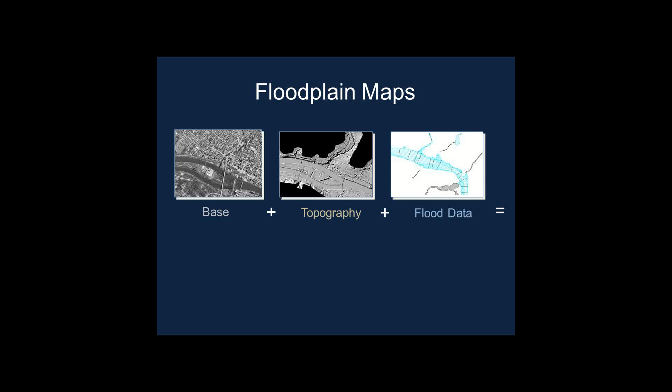And then imposed on that are a couple different engineering modeling techniques that predict and model the amount of water that flows through a stream or a floodplain and predicts the behavior of that water as it flows through the area. And then using those engineering and other techniques, they come up with these digital flood insurance rate maps.

And these are called, you'll hear us talk about flood insurance rate maps or FIRMs, and we'll get back to that a little bit later. And these are the official regulatory products that communities have to use in their floodplain management. And this essentially shows what happens in a 100-year or a 1% annual chance flood event. This shows where the flood is going to be.

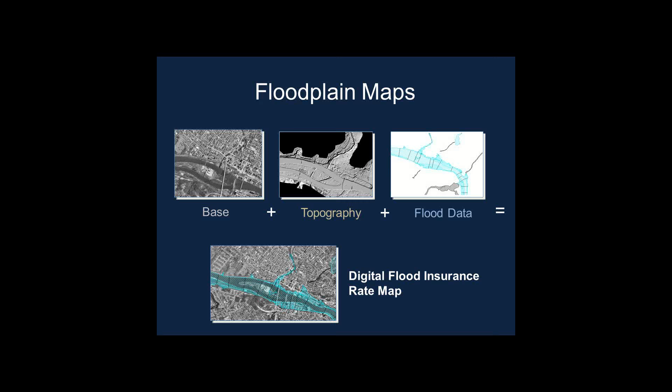And again, a lot of people say, well, it's never flooded here, so I don't have to worry about it. But they really do. This is reality. This isn't made up. These are accurate models that show where a flood is going to happen. And then based on those, communities have the responsibility to manage development in these floodplains that are on the map, and to regulate development here.

And for the folks in local government out there, if it's not your department, someone else in your local government is the one that is actually managing this development. And I think it's really important that planners, whether they're working on long-range plans or more of the development review side, understand what goes on in floodplain management, because it really does affect everything the community does, all aspects of how a community grows or develops.

So to take a little bit of a step back, communities have to elect to participate in the National Flood Insurance Program. And communities do that by agreeing to manage development in the floodplains and adopting an ordinance. And when they do that, then federal flood insurance is available to structure owners in the community. And so they participate largely because flood insurance is required by a building owner to obtain a federally backed mortgage. If they don't have flood insurance, the bank cannot lend to them.

And so an individual can only receive flood insurance if their community as a whole participates and stays in good standing with the National Flood Insurance Program. So this is one big incentive for communities to participate. And this is actually unique in the world. The U.S. is the only place that does it this way.

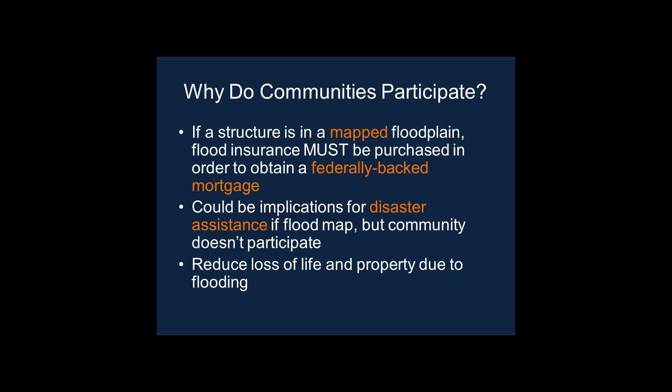Another reason why communities participate is that there could be implications for the availability of disaster assistance if there is a flood map that covers the community. And if the community doesn't participate, they may have limited access to the disaster funds. And at the end of the day, everything to do with floodplain management just reduces the loss of life and property due to flooding. That's what this is all about. The safer we have our buildings and the safer we have our people, the more resilient our communities are going to be.

And so everything in floodplain management comes from Title 44 in the Code of Federal Regulations. If you want to sleep at night, I recommend picking this up. And this is where everything can be found to do with floodplain management. And then in many states, they have their own separate state statutes or state regulations that deal with floodplain management. Here's an example of the Nebraska statutes.

And uniquely, Nebraska had our floodplain management statutes in place before the federal ones. So even if the federal regulations go away, communities in Nebraska still have to manage their development in floodplains. And then a lot of states will provide a sample ordinance or some sort of minimum standards that would go into an ordinance for communities. And this is an example, again, of Nebraska's minimum standards.

And so once you have these things in place, there is sort of a tiered level of regulations that have to be put in place based on the level of flood risk that is identified in a community. And these reference the elements of the CFR that relate to the regulations that have to be in place.

But for example, I think what's really important here is if you're in a community or working in a community that doesn't have a flood insurance rate map, they can still join the National Flood Insurance Program. It's still good to do so. And they have to make sure that development in their community is reasonably safe from flooding. I mean, if it's not mapped, if there's not a floodplain map, but there's a stream in the community, pretty evident that there may be flooding around that stream.

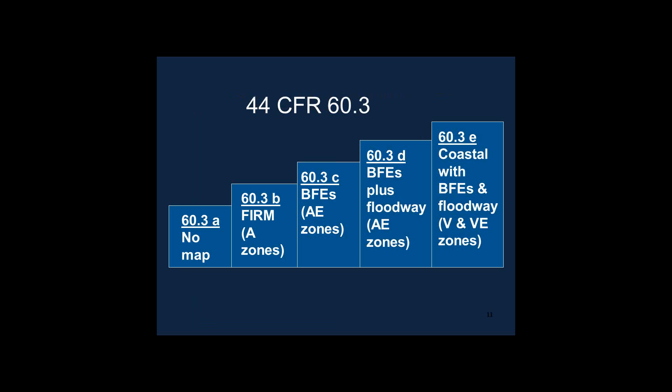And then taking a step up, when a community has a flood insurance rate map, there are various flood elevations that are determined or not determined in the creation of that map. And if there are no flood elevations determined, that's 60.3b, then a community can still participate, and they have to regulate development in a little different way. And then the more detailed the flood maps are as you go up this ladder, the more a community has in their power to regulate that development.

So really everything in floodplain management is pretty black and white, but there is a lot of gray areas. And that's why we have state entities like myself or like the Department of Natural Resources here. We help communities really understand those gray areas. And in many other states, there are similar departments and similar agencies that do that. And so it's wise to check that out.

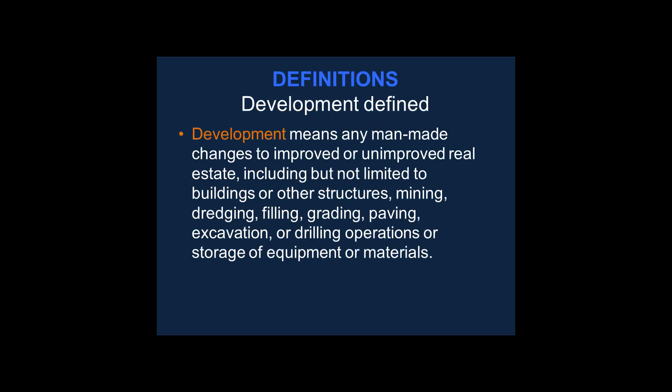And so I think what's really important is to help planners understand some of the big concepts in floodplain management, and that will help them really see where they can fit their activities into what the rest of the local communities do. And so I think that the first piece is really the definition of development. Floodplain management means regulating development in floodplains and anywhere in your community, and development is really just about everything you can think of. It's buildings, it's mining, it's filling, it's grading, it's storage of materials. Whatever it is needs to have some sort of floodplain development permit.

And that's the crux of everything we do in floodplain management, permitting any kind of development in the floodplains. And that's what local communities have the responsibility to do as they participate in the National Flood Insurance Program. And so these are some of the typical scenarios where we see floodplain development permits required, whether it's a new residential structure, any additions or improvements to existing structures, repair due to damage from natural hazards or fire, any kind of fill added, or public facilities improvements too.

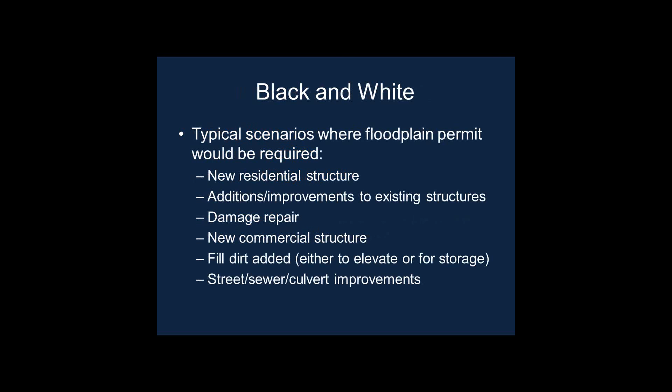And in a lot of communities, these are tied to building permits or zoning permits. But even in communities that don't have these, a lot of our small towns in Nebraska don't have building permits or zoning codes. And if they participate in the National Flood Insurance Program, they still need to regulate and permit development. And so they do that through a variety of means. And if anyone has questions about that, we can maybe answer those in the Q&A session. So again, a lot about floodplain management is technical.

And there are some other definitions that we should think of as we move forward in the presentation. A flood, by FEMA's definition for the flood insurance program, is surface water that affects a building on normally dry land areas. It does not mean groundwater, and in some cases does not mean rain that comes in through a hole in your roof. And a floodplain is any land susceptible to being inundated, and these are what are shown on the map. They may not be really anywhere near what someone would think of as a creek or a shoreline. A floodplain may extend very far into a community, and some people may say, well, I don't understand why there's a floodplain here, but it's shown on the map.

And the SFHA is a special flood hazard area. This is our technical term for floodplain, and you'll see that a lot if you delve into floodplain management. And the SFHA is designated by various flood zones. I've listed the A's here, but in coastal areas they are called the V zones. And then outside of the 1% annual chance, there are X zones.

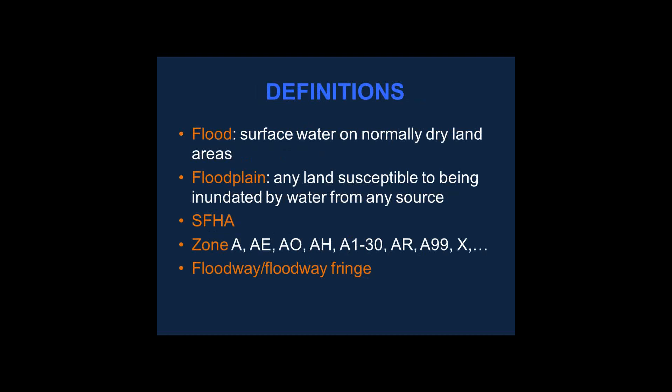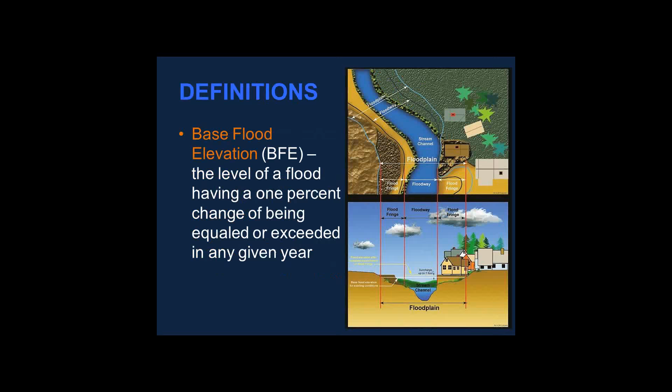And this is the level of a flood, the height of the flood in a 100-year event. And this is what development is based on and the regulations are based on. We'll come back to that here in a couple slides.

At the end of the day, these are some of the certificates and permits that communities deal with. Everything has to have a floodplain development permit. In some cases and in some scenarios, they'll need engineering certificates, and in some cases, they'll need elevation certificates. And if it's development in a floodway, in certain places, no-rise certificates are required.

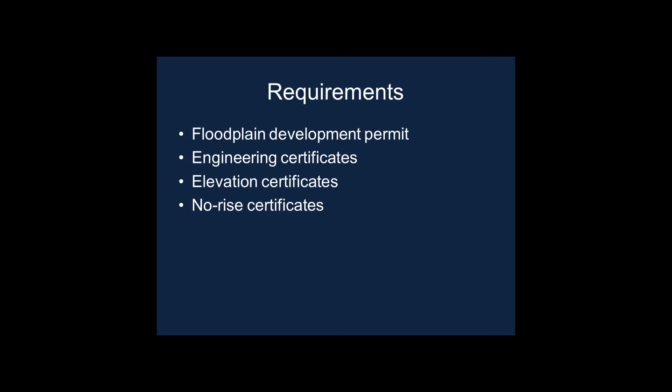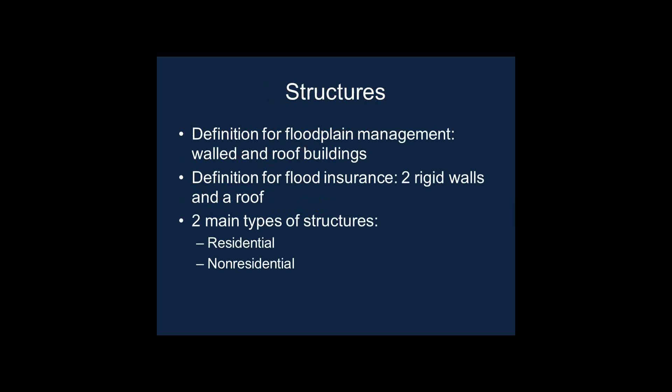And again, for floodplain management, structures are defined as walled and roofed buildings. And for flood insurance, which is a little different, a structure is considered 2 rigid walls and a roof. And in general, there really are 2 main types of structures, residential and non-residential, as well as appurtenant, although that gets a little into the weeds. But there is not necessarily a definition of commercial or public facilities. Everything is residential or non-residential for floodplain management.

And in Nebraska, we have higher standards than the minimum, but we require any residential structure to have their lowest floor, including the basement, elevated to at least 1 foot above that 100-year flood level, the base flood elevation. And this is really the key thing that I think communities need to make their other staffs aware of, is that this lowest floor is the deciding factor on the development of any particular residential structure.

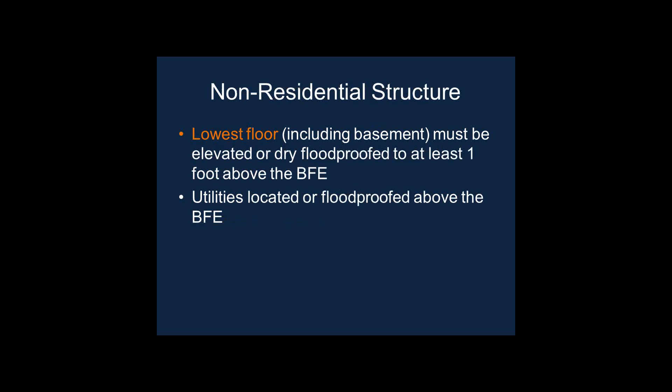And then for non-residential structures, again, this is in Nebraska, you should check in your own states. They have to be elevated or dry flood-proofed to at least 1 foot above the base flood elevation. And dry flood-proofing is a technique to keep the water out of a building. Again, that's going into the weeds.

And often we have building sites that are too low or a structure that needs to come into compliance with that 1 foot above base flood elevation. And there are various ways that we go about helping individual property owners do that. On a residential structure, in some communities, you can add fill to a site to elevate it above the base flood elevation. In some communities, you can't. That's something that you really need to check on in your own communities.

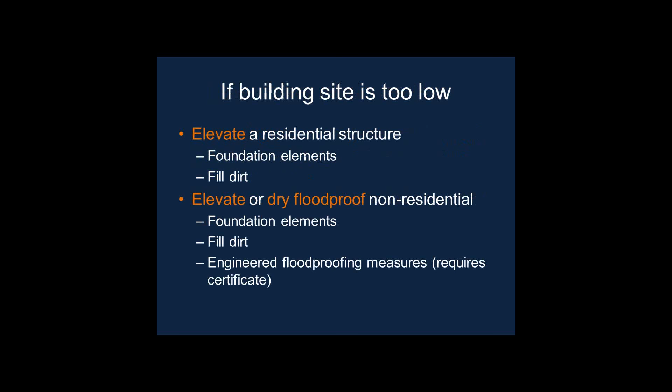And then obviously adding foundation elements, like adding more blocks to the foundation or adding piers or something can certainly elevate a structure to above the base flood elevation. And on non-residential structures, you can also engineer flood-proofing measures, but this requires an engineering certificate.

Stepping back a little bit, I think this is outside of the purview of the National Flood Insurance Program, but as a planner, I think it's really good for planners to understand how floodplain management could factor into long-range planning. And I think at the end of the day, floodplain management really does give planners good tools to use when they think long-term. We give flood maps. The flood maps are there. They're available to anyone, and they show where the true flood risk is.

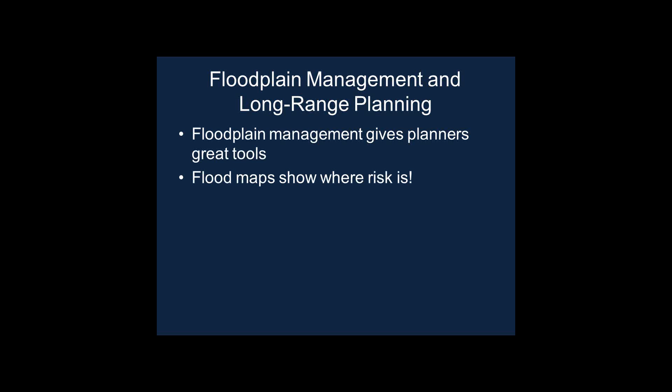And I think it's our responsibility as planners to pull this out, to put this in our long-range plans, and to really show people that the best practice is just to not develop in a floodplain. Some communities don't have a choice, whether it's located on the coast, or some communities are located entirely in a floodplain, and they might not have known that in the mid-1800s when they developed there. But for new growth areas, it comes down to the simple fact of just don't develop in the floodplain.

They're risky areas, development's more expensive, and it really does disrupt people's lives when a flood does occur. And it's not if, it is when a flood occurs. And I think when planners focus on flood risk in long-range planning, they really can use that opportunity to help a community grow in a different direction, which really is cheaper in the long run. It creates more resilient communities, neighborhoods, and homes.

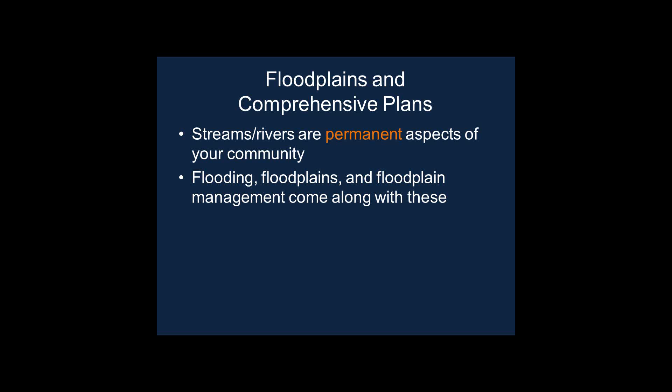And I think comprehensive plans are obviously good places to do that. Comprehensive plan looks at your community as it exists now. Streams and rivers are permanent aspects. You can't remove them. You can maybe change them, but they are permanent aspects, and the floodplains that come along with them are also permanent. And comprehensive plans are good places to discuss this and to have a community conversation about it. They really should account for floodplains and for the flood risk that is apparent in communities.

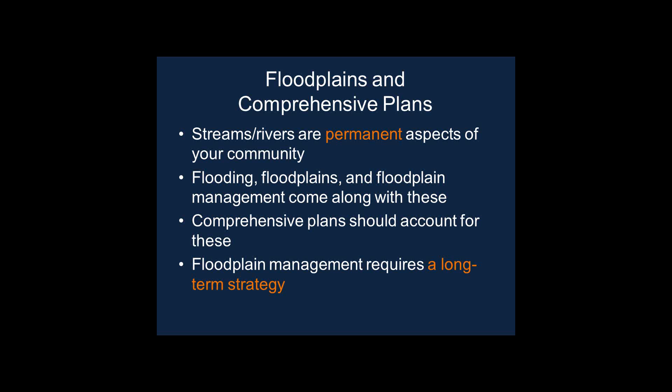And good floodplain management really does require a long-term strategy. Typically, we deal with individual homes, individual businesses when we do the permitting day-to-day. But I think if a community wants to be truly resilient, it does require a long-term strategy. I think at the end of the day, any community that has a floodplain can see it as a limitation, or they can see it as an opportunity.

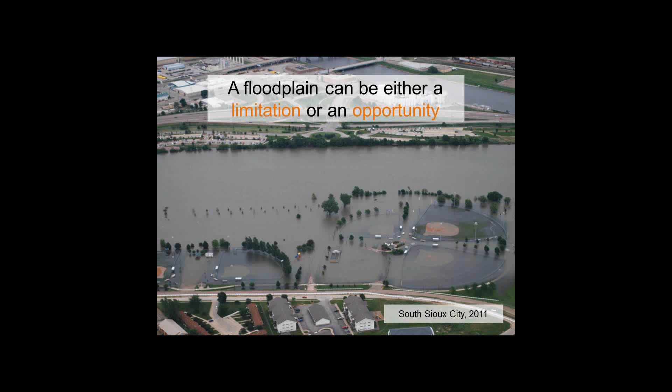And so now I'm going to turn it over to Shandy to talk to us about flood insurance. I think we're good to go. Shandy, take it away.

All right. Hi, everyone. I'm just going to expand my screen here. There we go. Oops. Would help to start at the beginning here. Can I just get a quick confirmation that my screen is showing? It is. Great. Thank you, Elizabeth.

So as Mitch said, I'm going to focus this last part of our presentation on flood insurance. My name is Shandy Telshik. I am currently a Natural Hazards Program Specialist with FEMA Region 7, which is located in the Kansas City office.

And I specifically focus on the National Flood Insurance Program and work with communities that participate in the program and communities that would like to participate in the program, providing technical assistance on the various aspects of the NFIP. And specifically, I work with the state of Nebraska and work with Mitch quite a bit.

So I'll just reiterate something that Mitch said, which is basically summarizing the National Flood Insurance Program, or NFIP for short. It is a federal program. It was established through the passing of the National Flood Insurance Act of 1968. And basically, it's a voluntary program that's based on an agreement between local communities and the federal government.

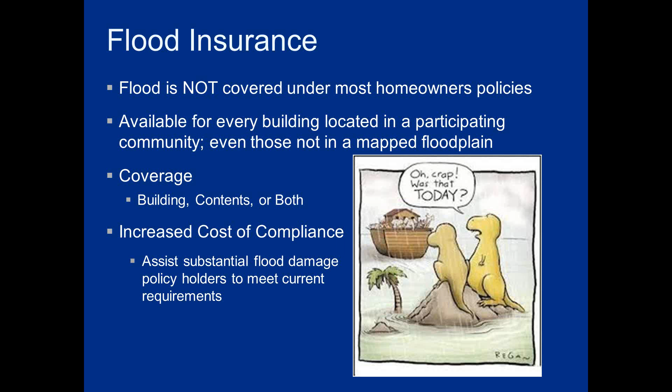I'll move on. So insurable by the NFIP. We get a lot of questions when we're out talking with communities, especially after those floods, about what does flood insurance actually cover. A lot of questions about croplands here in the Midwest, and the National Flood Insurance really only covers damage to structures. We're looking at walled and roof structures, principally above ground, manufactured homes or travel trailers. If they're anchored on a permanent foundation, we're going to cover those contents of those structures. And we'll also cover buildings that are in the course of construction as well.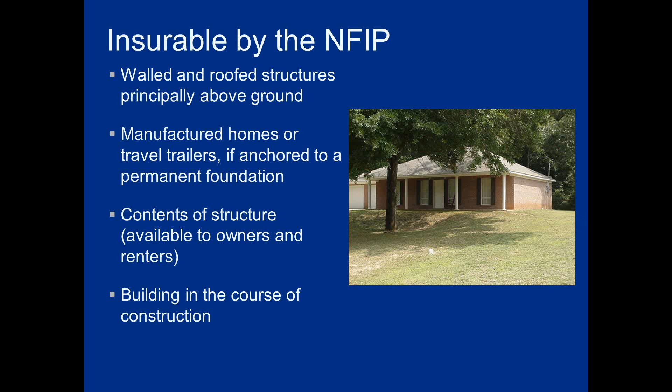Now, another thing we definitely want to cover when we talk about flood insurance is what goes into establishing a premium for a structure and how much premium a person will pay for this flood coverage for their home. I would say the two most important things that come into play are the flood zone and then the lowest floor elevation compared to the base flood elevation for that structure.

The flood zone, that's going to be, as Mitch described, basically, is that structure in the high-risk floodplain or the low-risk floodplain? The high-risk floodplains are those zones that begin with A or V, like in velocity zones along the coast. Or is it in a low-risk floodplain? And those zones start with C, B, or X. So the higher risk flood zones, as you can imagine, are going to cost more than those low risk zones.

Also, I'm going to skip one here on my bullet point because I think the lowest floor elevation compared to the base elevation is going to be the next most important factor used for rating. So when a structure is built, that lowest floor, including a basement or crawl space floor, will be compared to the base flood elevation. And there's an indirect relationship here between that lowest floor compared to the base flood elevation and how much premium will be charged. So basically, the higher the lowest floor is compared to the base flood elevation, the cheaper the flood insurance rate will be. I'll go into this in a little bit more detail in the next couple of slides.

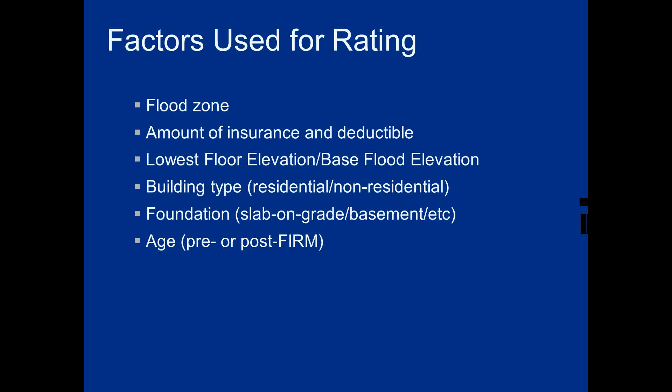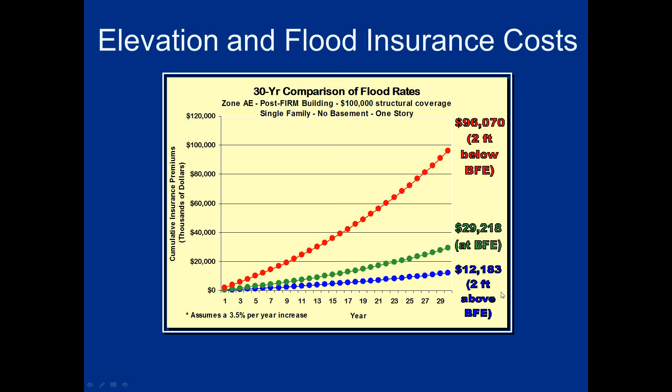I have another way to illustrate this. This illustration was put together as a result of some legislation that was passed in 2012, and I'll be touching on that here shortly. But again, illustrating the difference that following floodplain management and elevating structures can really make for the individual for their insurance premiums.

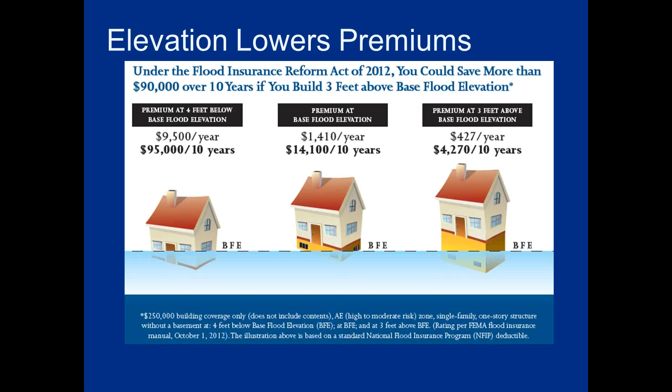So really the bottom line here is that all these different aspects of the National Flood Insurance Program really do work together. Everything on the floodplain management side directly or indirectly affects flood insurance rates. When high-risk areas are identified, revising those maps, when communities want to do any kind of flood risk reduction projects, we always encourage them to budget for that potential map change, because if there's decreased risk in the community, we definitely want the maps to show that decreased risk as well.

And then the as-constructed elevation certificates, these are documents that communities can use to document that the structures they are permitting in their community are in compliance with the floodplain management regulations. These are also a hugely important tool for flood insurance agents, because the agent really has no other way to know anything about the structure that they're insuring, especially from the flood side of what they're looking at. So these elevation certificates, if you've never seen one, it's a FEMA form.

It contains information about the location of the structure, address, property owner name, community information, base flood elevation of the structure's location. It has various elevation information such as lowest floor, next higher floor, the elevation of the mechanical and utilities, and electrical connections. There's also lowest adjacent grade and highest adjacent grade elevations on the exterior of the structure. These are all important elevation notes that go into the insurance agent's software so that the structure can be accurately rated.

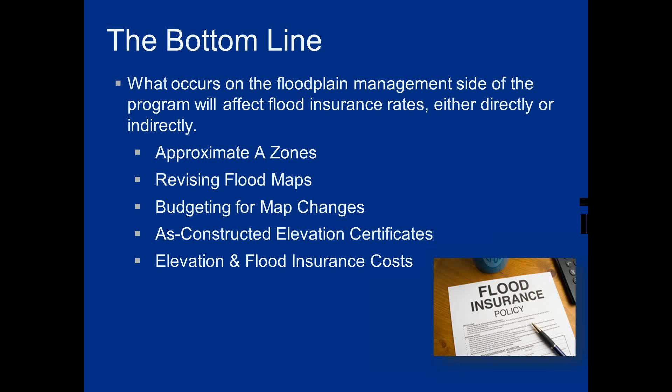Now I did want to touch some on the legislative reform that's happened in the last few years. In July of 2012, Congress passed what was called the Biggert-Waters Flood Insurance Reform Act of 2012, and the whole point of this, I know it's no secret to probably anyone on this call, is that the National Flood Insurance Program is quite a bit in debt, and in recognition of that, Congress basically, with the passing of this Biggert-Waters Flood Insurance Reform Act, wanted to move the National Flood Insurance Program to a more actuarial-based premium rating structure.

To give you a little bit of background on that, I described those pre-FIRM and post-FIRM structures. Well, pre-FIRM structures were moved into a subsidized flood insurance category mainly because those structures were built before any flood risk information was known, and so they were really given a break on the insurance side of things. Now, BW-12 really pretty much removed the subsidies for those pre-FIRM structures. So what we found across the country is that many people who owned these pre-FIRM structures were really getting hit hard on the flood insurance side, and their premiums increasing drastically. I'll cover a little bit more on that in just a moment.